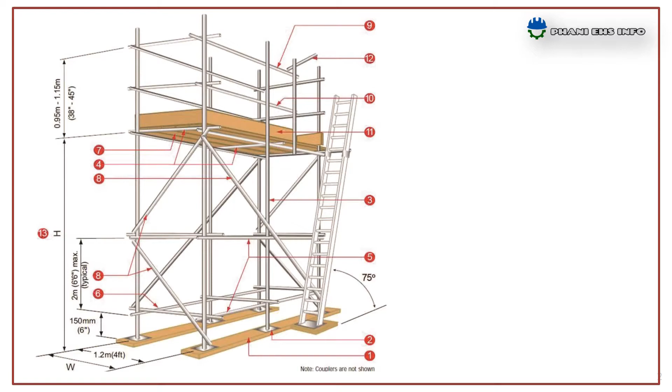The first one, scaffolding. Scaffolding is a temporary platform used to safely work at height areas. The basic parts of scaffolding are sole plate, base plate, standard, intermediate transom, ledger, transom, platform, bracing, top rail, mid rail, toe board and self-closed drop bar.

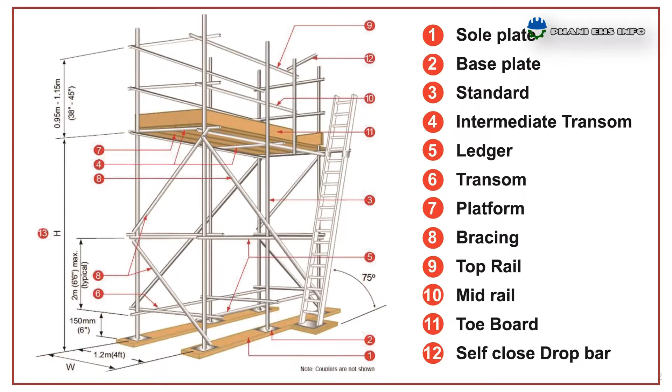Now, safe use of scaffold. Always remember to install a top guardrail at height from 900 mm to 1150 mm and intermediate guardrail at height from 450 to 600 mm. Toe boards of not less than 200 mm shall be installed to prevent falling of persons and materials.

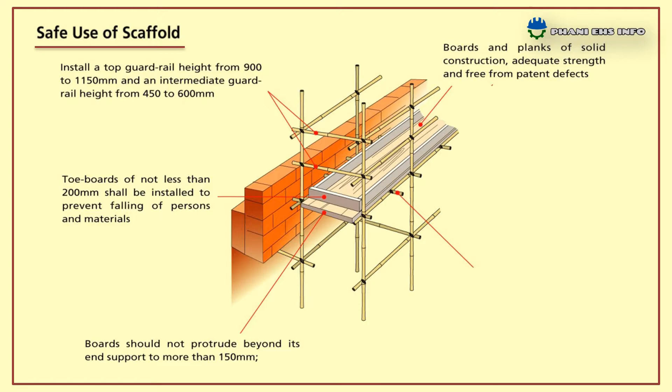Boards should not protrude beyond their end supports by more than 150 mm. Boards and planks should be of solid construction, adequate strength and free from patent defects. Width of the platform should be at least 400 mm. Standards should have adequate strength to support the load.

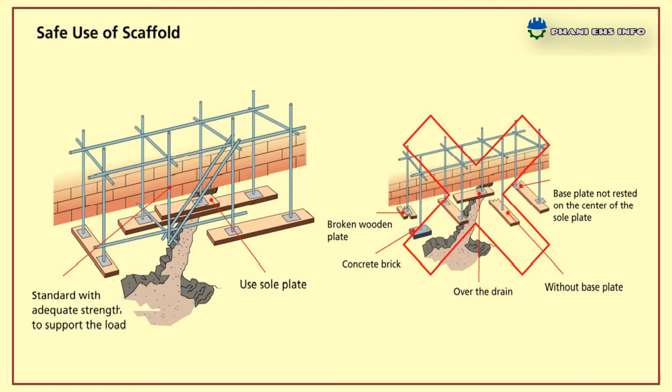Always use sole plates and do not use broken wood plate or concrete brick, and do not erect the scaffold over the drain. Remember, the erection, addition, alteration and dismantling of scaffold should be done by a trained workman with adequate experience under the supervision of a competent person only.

Only solid and steady points of a building or structure should be used for supporting the scaffold and related facilities. The scaffolding must be inspected by a competent person in the following situations: before use for the first time, after addition, dismantling and alteration, after weather conditions likely to have affected its strength or stability, or to have displaced any part.

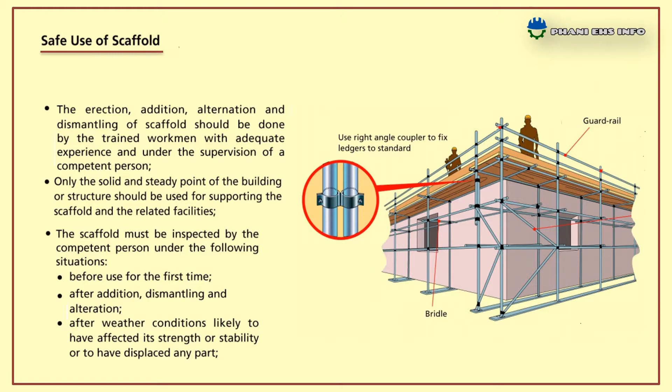While using a mobile scaffold, the height to least base ratio of the mobile scaffold should not be more than 3.5. Scaffold should not be used outdoors in strong wind and adverse weather conditions.

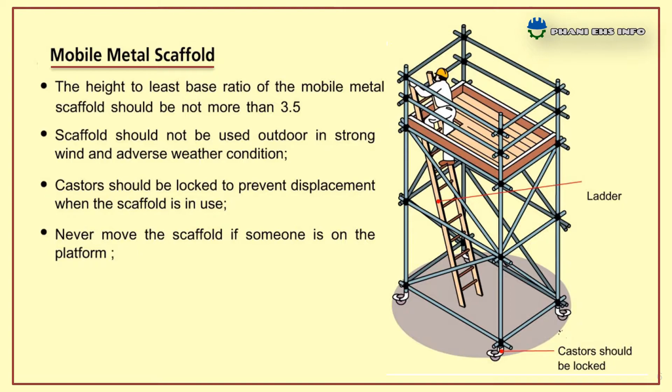Castors should be locked to prevent displacement when the scaffolding is in use. Never move the scaffold if someone is on the platform. Rakers should be used in accordance with planned procedures to ensure the stability of the scaffold.

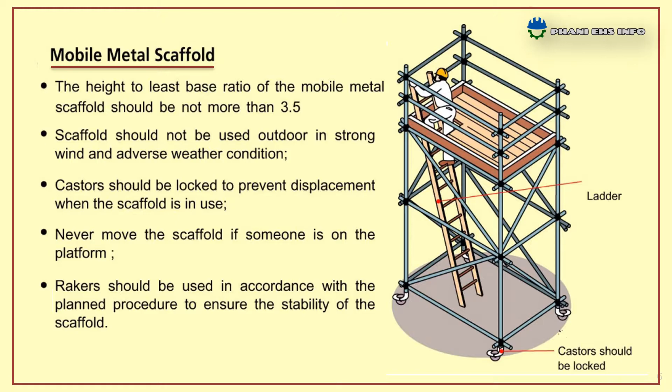While using a mobile elevated working platform, the platform should be designed and examined by a registered engineer. The actual load on the platform during work must not exceed the certified safe working load. The operator should follow the written instructions from the manufacturer to operate the platform.

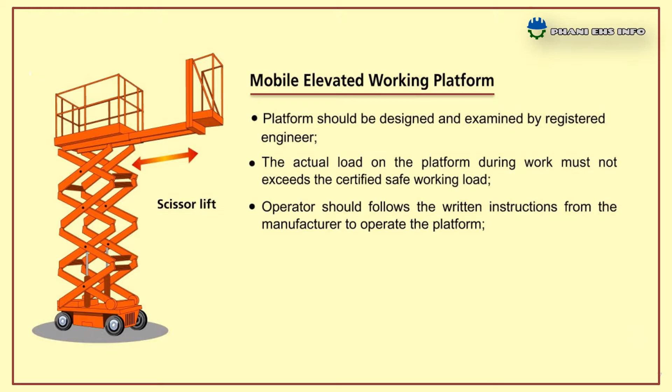Install guardrails and toe boards at the working platform. A competent person should supervise the erection, dismantling and alteration of the platform.

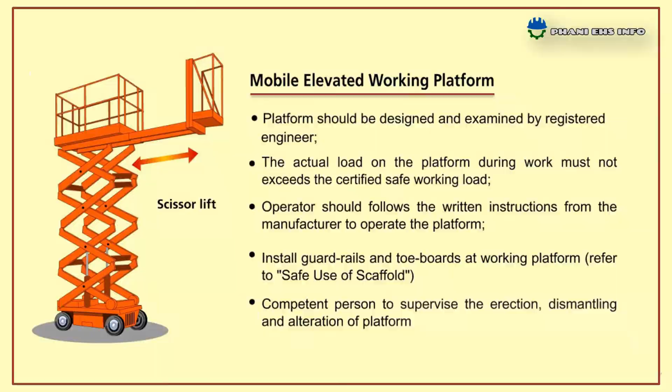Next one, suspended working platform. A suspended working platform is a lifting appliance for carrying workers to the facade of buildings to conduct cleaning, construction or maintenance work. Accidents involving it are basically caused by failure of lifting appliances, failure of suspension ropes, overloads, unsecured anchorage points, inappropriate guardrails, and human error during operation of the platform.

A 4-rope system includes 2 suspension ropes and 2 extra safety ropes. A fall arrestor is equipped at each safety rope to prevent falling or tilting of the suspended working platform.

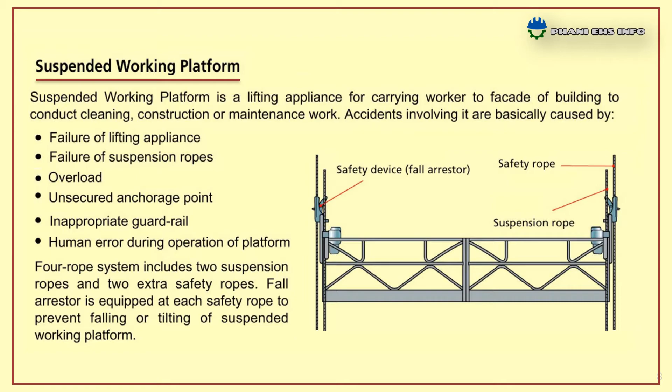While using the suspended working platform, it must have solid construction. The platform must have guardrails and toe boards. Lifting appliances should be securely fixed at the roof to ensure the stability of the platform.

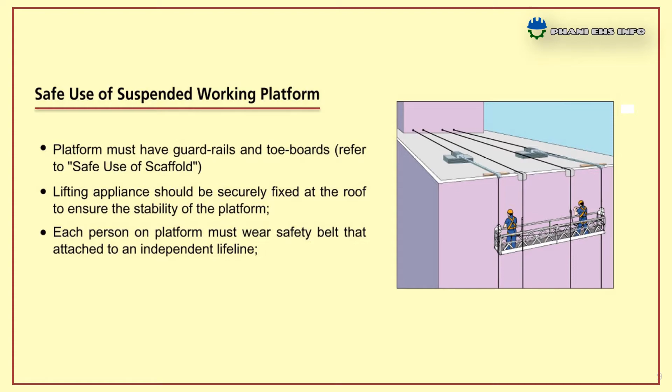Each person on the platform must wear a safety belt attached to an independent lifeline. Conduct the mandatory test, examination and weekly inspection.

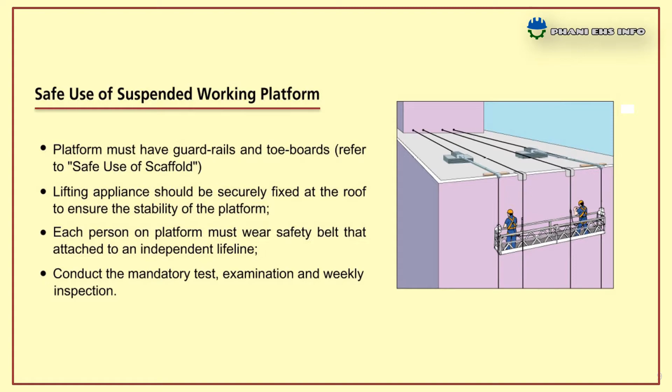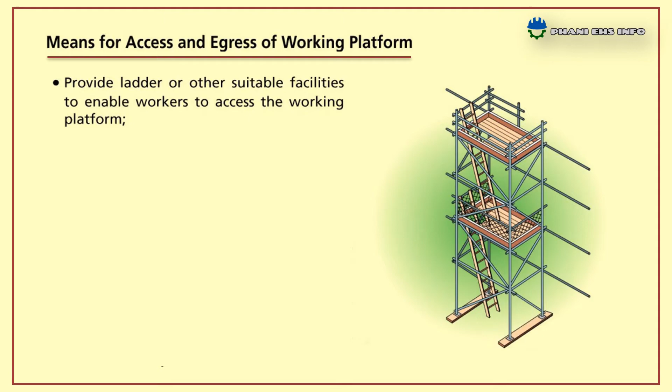And now, the means of access and egress of working platforms. Provide a ladder or other suitable facilities to ensure workers can access the working platform. The angle of rest of the ladder should not exceed 4:1.

Ladder should rise at least 1 meter above the stepping off point as a handhold. Scaffold with ladders as means of access and egress should have ladders securely fixed to the scaffold structure. The landing places of ladders and staircases must be completely and closely planked and fitted with suitable toe boards and guardrails.

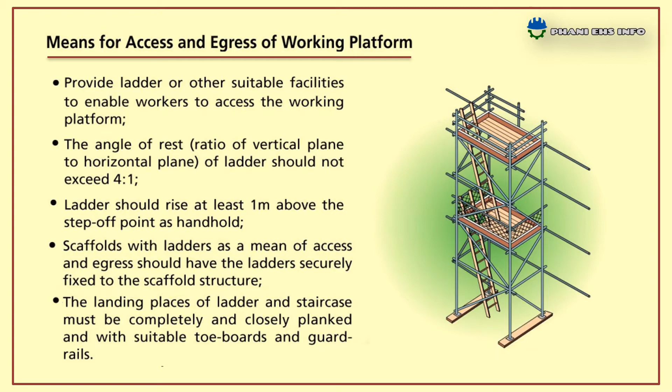Safe use of straight ladder. A straight ladder should rest at an appropriate angle against the supporting material, or its stability will be affected. The ladder should be fixed on the supporting material, or if impracticable, secured by a second person at the bottom. The ladder should rise at least 1 meter above the targeted height as a handhold.

Before use, check to ensure that the side rails and rungs have no cracks or damage, and that anti-slip caps at the bottom are present and firmly attached to the ladder.

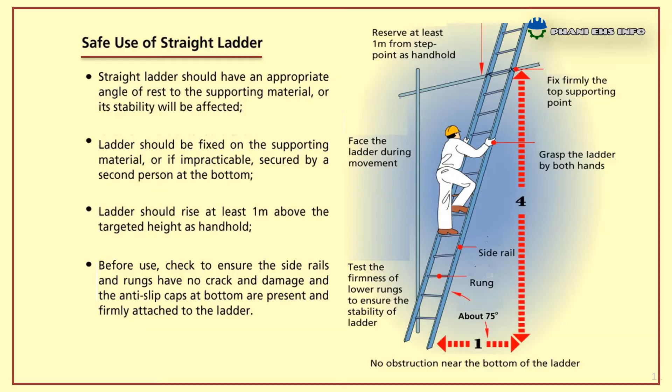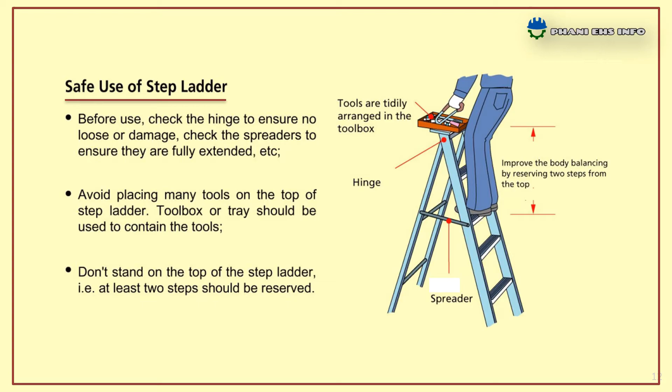Next one, safety nets. To secure a working platform, safety nets should be provided. The installation and dismantling of safety nets are hazardous, therefore this process should be carefully planned and supervised.

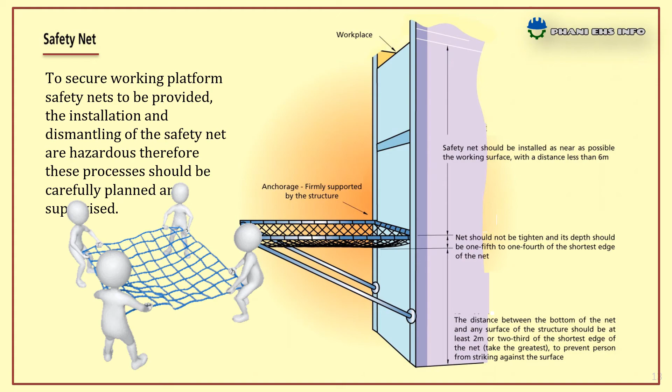For safety nets, the anchorage must be firmly supported by the structure. The safety net should be installed as near as possible to the working surface, with a distance of less than 6 meters. The net should not be tightened, and its depth should be 1/5 to 1/4 of the shortest edge of the net.

And next one, safety harness. The safety harness is composed of straps, buckles, etc., with an appropriate combination to support the body of the worker. When a person is falling, the safety harness can distribute the resulting force to the whole body in order to reduce the impact on its user.

The main components of a safety harness are the shoulder strap, secondary strap, sit strap, thigh strap, back support for work positioning, adjustment element, fall arrest attachment element, buckle and marking.

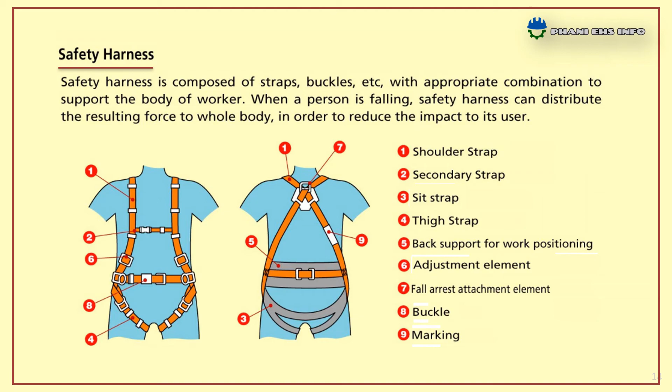How to use the safety harness correctly? The hook of the safety belt should be attached to an anchorage above the user to reduce the falling distance. The hook of the safety belt should be attached to a secured anchorage.

The fall arrestor of the belt should be attached to an independent lifeline. Don't remove any components of the safety belt, and inspection of the safety belt should be conducted regularly and before use. Any wear and tear, etc., of the belt should be identified.

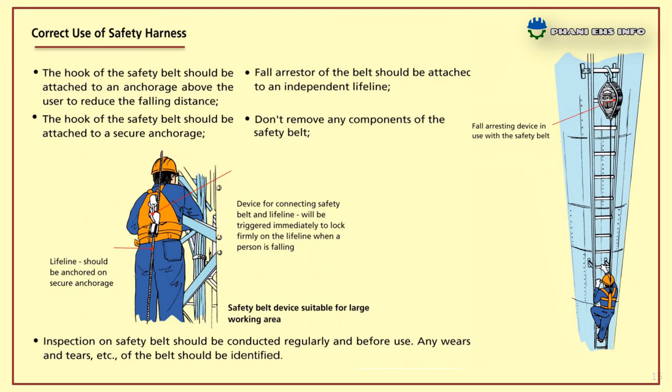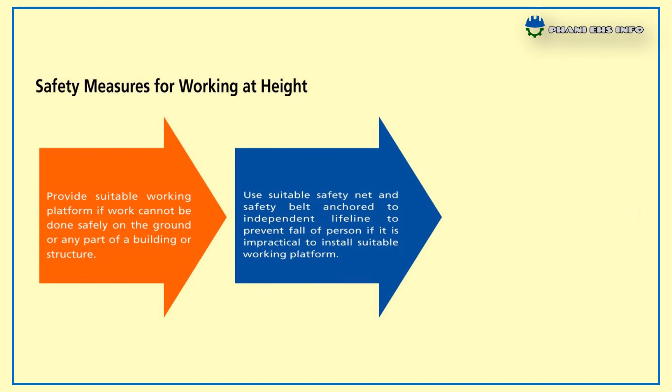The main safety measures at working at height are: provide a suitable working platform if work cannot be done safely on the ground or any part of a building or structure. Use a suitable safety net and safety belt anchored to an independent lifeline to prevent the fall of a person if it is impractical to install a suitable working platform.

Use a safety belt anchored to an independent lifeline. It should be the last resort to prevent the fall of a person.